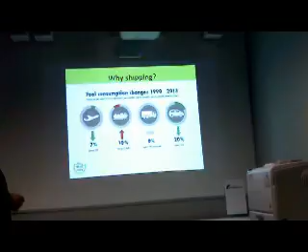So, yes, fuel consumption 1990 to 2013, energy per kilometer, cars, trucks, etc. This is just a comparative analysis, this is the ICCT information, the fuel consumption or the carbon. This is a 7% drop. Trucking more or less the same. Cars has dropped because we have got hybrid cars, etc. But the shipping has increased 10%. So that is something alarming. And of course, we have taken this from different sources.

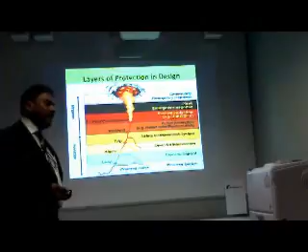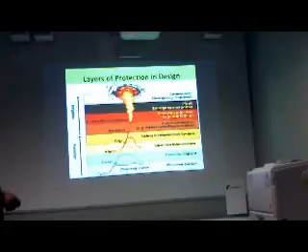So it is saying that shipping, although it is the cheapest mode of transportation, needs to be better organized. So let's see how we are able to design the protection against the problem, or against the challenges which are given to us by LNG.

That's one of the challenges at the moment. We were listening to the word that LNG is the future, LNG is the future, but that future has a big drop. LNG hasn't flown the way it should have. Of course, it is because of the geopolitical situations and the supply and demand situation.

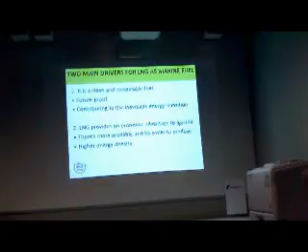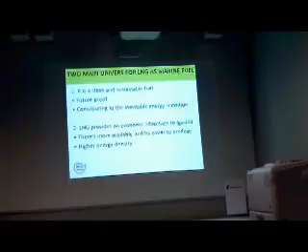So there are two main drivers for LNG here. Number one, it is a clean fuel and sustainable fuel, as you rightly said. It is sustainable fuel, it is future-proof. Why are we saying it is future-proof? Because it is giving us the possibility - there are enough supplies underground, even with the finding of shale gas and other, that it will be there for a few hundred years.

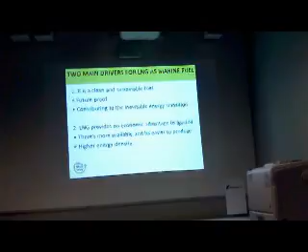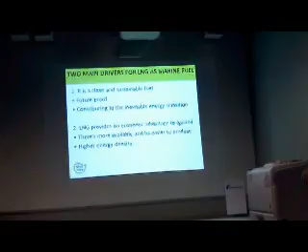And of course, it is contributing to the inevitable energy transition from a heavy carbon footprint to lesser carbon. LNG provides an economic advantage over gas oil, is more available, and is easier to produce with high energy density. So this is the transition we are witnessing at the moment.

And of course, because many of the ships are converting to LNG, we are also expecting the possibility of getting more LNG barges. The other driver for it was the ECA regulation, which is driving us to definitely go for marine fuel.

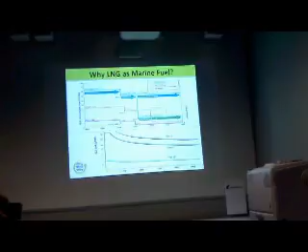Why am I giving you this background? So you need to know the background of what you are dealing with, and you may be able to see your future here. So at the moment, we have passed this line. We have recently passed this line, and of course now the ECA is implemented earlier this year. And now the future big thing is going to happen in 2020, which is still yet to be decided.

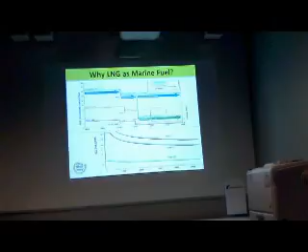So now, at the moment, we want to reduce the NOx level worldwide. We want to reduce NOx - stands for nitrogen oxides - sulfur emissions, and of course we want to reduce the carbon emissions also. So these are various limits of NOx, tier 1, tier 2, tier 3. Of course, I'm not going into the detail. You can have a look at it on the internet.

The world has also decided future ECA areas, which include the full Mediterranean, Black Sea, etc., and around Japan and Mexico. Is the Black Sea already an ECA area or is it future? The Baltic Sea, Scandinavian countries, the Black Sea near Odessa - that is a future ECA area, not yet in place. The local governments are implementing certain rules.

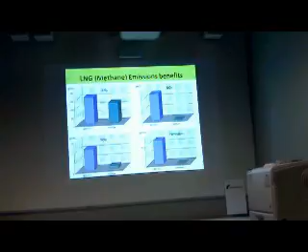The ship owners were not converting their ships, saying there is not enough infrastructure - not enough bunker barges or bunker facilities around the world. And the bunker industry was saying there are not many ships whom we are going to bunker, so if there are ships, we are going to invest our money or put the money where the mouth is. At the end of the day, the industry is trickling up, and unfortunately we also have a fall down of prices.

So competing LNG with diesel oil has gone fairly low. These are some threats.

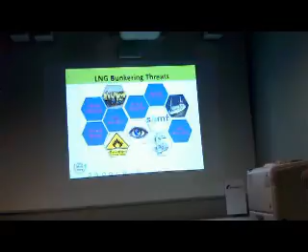The trained personnel we require is one challenge. This program, Motorways of the Seas, has created a number of training activities which we have done. Natural hazards related to LNG - the industry has managed it very well, and the hazards are fairly low. There is a public perception that LNG is not a very good solution because of its hazards. You have seen a couple of videos from American sources showing it is not as bad as we think. And policy and regulations - some of them are already in place, some the industry is acting on and creating. Of course, the biggest challenge is the bunkering.

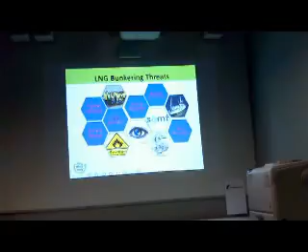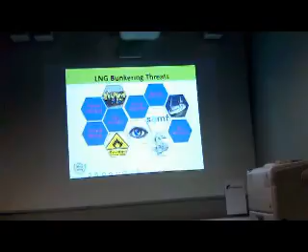So technically, natural hazards we are taking care of. Public perception is slowly and gradually changing. On policy and regulation, in June this year we got the new IGF code. There will be amendments to SOLAS and STCW, and the Society for Gas as Marine Fuel is an independent body which is at the moment creating guidelines.

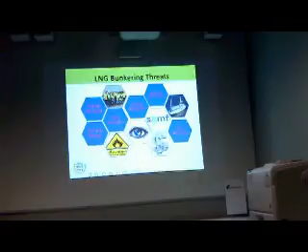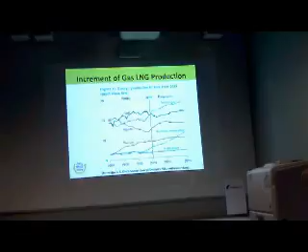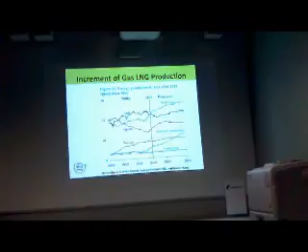This is a US EIA annual energy outlook, giving us the outlook up to 2020 and 2035. Here you can also see natural gas prices going up a little post 2020, but fairly steady till then.

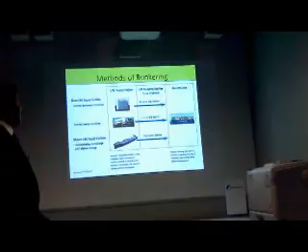So that was just the background to give you a wider understanding. Now we come to our subject, which is LNG bunkering. For bunkering infrastructure, we require multiple types of infrastructure to facilitate these ships, the receiving ships.

We need the storage facility, and of course we need an LNG liquefaction plant, but that liquefaction plant could be in Qatar or anywhere in the world. The LNG is transported by ships to these supply facilities or storage tanks, and from there it can either be transported.

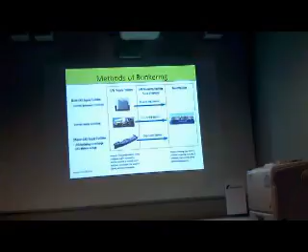By trucks, which is still happening in a lot of Scandinavian countries and even in other European countries like in the Mediterranean. They are supplying with trucks, but trucks is not a viable option because it takes multiple loads of trucks to fuel one ship, and fueling one ship will take a long time due to the limitation of pumping, pipes, etc.

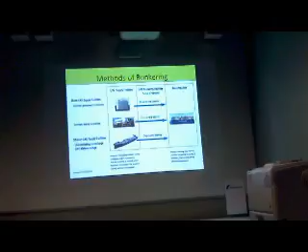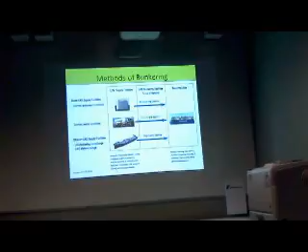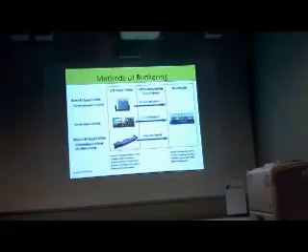If the ship is there for a very long time, truck to ship could be a viable option, but the only economically viable option is the bunker barge. So you folks would be working on these bunker barges, or related to them, or interacting with them. This is the whole objective of this project: to create and transfer knowledge for this transportation, focusing on ship-to-ship transfer, which is going to take place.

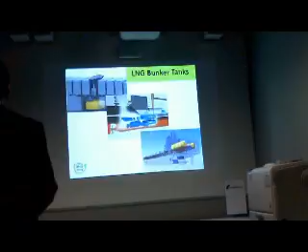Mind that the density of LNG is less than half of even the water density, so it is very light. It does not take a lot of weight, but that is the good thing about it. As a negative, we cannot store a lot of weight in a small space; we need volume. Although we have reduced the volume 600 times from natural gas when we liquefied it, the industry and researchers and engineers are designing different types of tanks.

Mark III has designed a tank which is a membrane tank, which can be accommodated in any space or any shape of space, so it does not need a lot of wasted space. We are going to do the membrane tank this afternoon, practicing on the membrane tank and ballast, so you will be able to see that.

For the process of LNG bunkering, we need to divide it into different zones. Wherever the LNG bunkering is happening, the interface is designed. The nearest point around where the bunkering interface happens is called the hazardous zone. Note it down, hazardous zone. Virtual learners, please note it down — small things like that could be in your exam.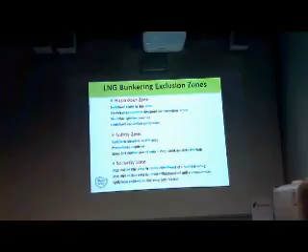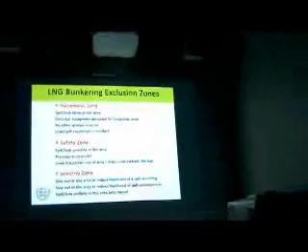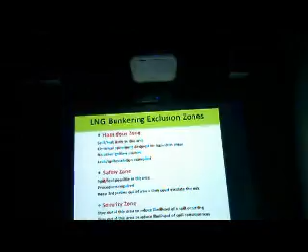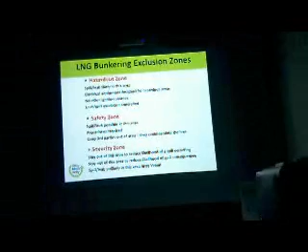Let's switch off the light, maybe. Light is interfering with it. Is the focus better? No. Is it better here? No. That is fine, I think it will work next time because this will be uploaded for them. Yes, just it's okay, it's okay.

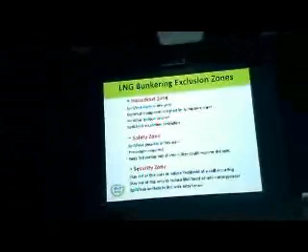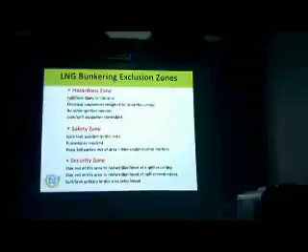Maybe they are able to see it better, but anyway, folks who are virtual learners, if you are not able to see this thing clearly, the same presentation will be uploaded on the system so you will be able to see that.

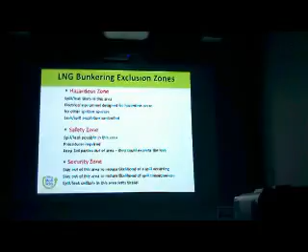Electrical equipment designed for hazardous areas, no other ignition sources, and of course leak, spill, and escalation control. So the hazardous zone is an area very close to the place where this interface is happening. Then we have got a safety zone — leak or spill possible in this area, procedure required, so third parties to be kept outside of this area. And then there is a security zone, which means staying out of this area to reduce the likelihood of spill occurring — spill or leak is unlikely in this area or vessel. So we divide them into three main areas you are supposed to know: hazardous zone, safety zone, and security zone. The hazardous zone is the most dangerous area, where we are trying to make it as safe as possible.

Zone zero is interiors for gas tank, where we are loading the gas - inside or around the gas tank is zone zero. We are now talking about the vessels: pressure relief valve, pipe work or venting system for gas tank is also zone zero. Pipes and equipment containing gas - anything which has gas in it or which could possibly have gas in it is the zone zero, or area most dangerous.

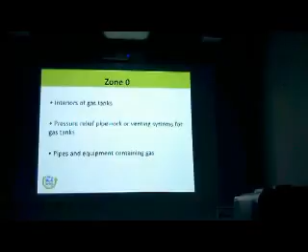Zone 1 is the fuel containment system space, like for example a spherical tank. You have seen on the simulator yesterday that it is the area around the hold space where this spherical tank is put into socket. Gas compressors or fuel preparation rooms with ventilation.

Areas on open deck or semi-closed spaces on deck within 3 meters of a hazardous outlet - this is the key point which you will have to remember. Within 3 meters of hazardous outlet, this is a kind of circle which is created 3 meters around those points.

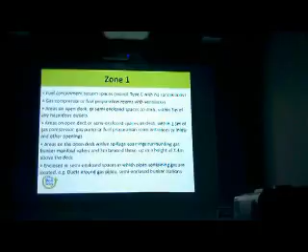Areas on open deck, semi-enclosed spaces within 1.5 meters of compressor, gas pump or fuel preparation room entrances, inlets and other openings. Areas on the open deck within spillage coaming, surrounding gas bunker, manifold, valves, and 3 meters beyond these, and up to the height of 2.4 meters above the deck.

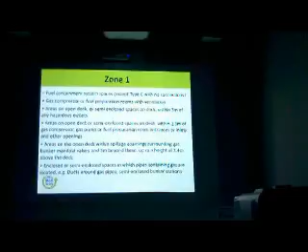Enclosed or semi-enclosed spaces in which pipes containing gas are located, for example a duct around gas pipelines - this also includes other semi-enclosed spaces like bunker stations. Bunker stations normally are a gas-free area, but there could be a leak of gas there, so that's why we consider it as zone 1.

Zone 2 is type C fuel containment system space where there is no connection - areas within 1.5 meters surrounding the opening of a semi-enclosed space of zone 1. So here we are presenting all these things. This is the whole LNG tank, or the LNG pack, we can say. This is your zone 0 where you have got cargo loaded or cargo containment system. Then we have got zone 1 where there is an interface between the ship and shore, and then of course we have got zone 2, which is the area around the vessel.

Just to show you, this is also one of the methods. These are your main LNG lines coming in here, and of course you are loading through different points - these are your spray headers, etc.

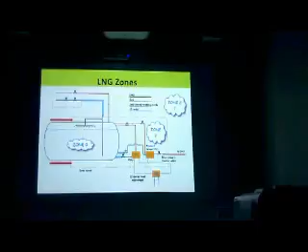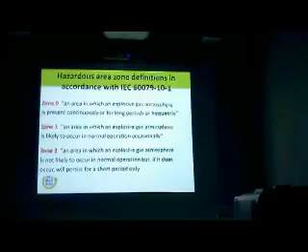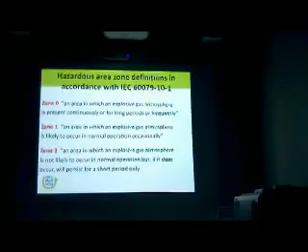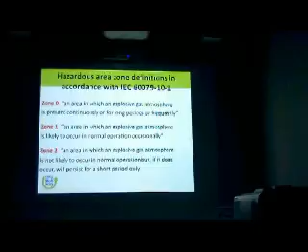Again, just to summarize it, according to IEC 60079-10-1, these are the precise definitions. Zone 0: an area in which an explosive gas atmosphere is present continuously, for long periods or frequently - meaning your tanks, pipelines and other associated equipment inside those. Zone 1: an area in which an explosive gas atmosphere is likely to occur in normal operation occasionally. Zone 2: an area in which an explosive gas atmosphere is not likely to occur in normal operation, but if it does occur, it will persist for a short period only.

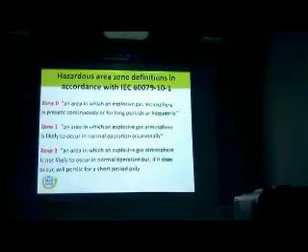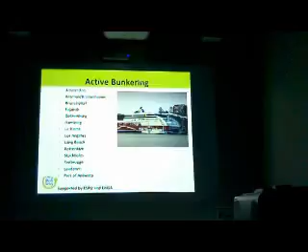Now we are showing you, at the moment there are a number of ports. Mostly Europe is the fastest in it, but America has also taken a lead. We have got LNG bunkering arrangements in Amsterdam, Bremen, Fujairah, Gothenburg, Hamburg, Le Havre, Los Angeles, Long Beach, Rotterdam, Stockholm, Zeebrugge, Port of Antwerp, and of course many more ports are coming up now. Port of Barcelona is making some arrangements, Greece ports are making arrangements in the Mediterranean, and La Spezia terminal is going to arrange some bunkering facilities. So these are a few ports which I have learned are going to be working on active bunkering facilities.

The picture you see here is Europe's first vessel which is fully prepared, fully designed, and runs on LNG bunker only. This is a converted vessel of the AGA Linde Group, which has got one pressure vessel on it and can supply the gas to this vessel. This particular vessel has done over 500 safe operations so far, without any major incident.

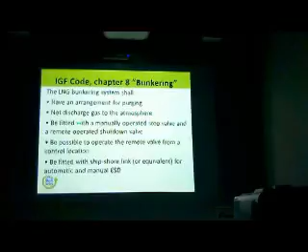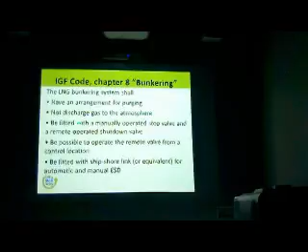Now, I have mentioned earlier that IMO has created a code. The IGF code has finally been approved earlier this year, or middle of summer this year, and chapter 8 is about bunkering. It says the LNG bunkering system shall have an arrangement for purging.

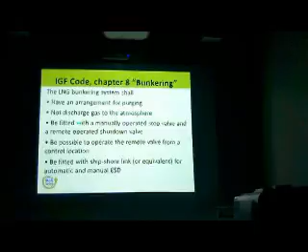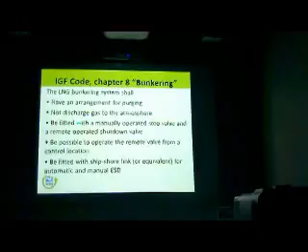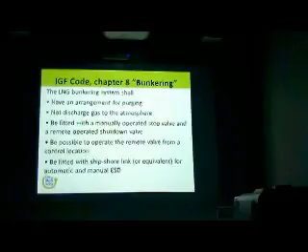Purging you will experience on the simulator - not discharging gas to atmosphere. The system must be fitted with a manually operated stop valve and a remote operated shutdown valve. It must be possible to operate the remote valve from a control location, and it must be fitted with a ship-shore link or equivalent for automatic and manual ESD. Mind that ESD stands for emergency shutdown.

So prior to bunkering, if you are sitting in an office, you need to check the compatibility - meaning the hose connections, getting alongside the bunker barge, and all other ship-to-ship interface readiness. Once this assessment is done and you know the bunker barge couplings can connect to your couplings, etc. - because at the moment there is no uniform couplings, there are multiple manufacturers making these couplings, and they all claim they are better, they may be - then we have a bunkering checklist, which I will give you shortly to see, and of course you will also witness this. So pre-bunker activities mean the communication, etc., which we are going to talk about a little later.

So folks, that was the first phase of our bunkering presentation. And now we'll go for the simulator.